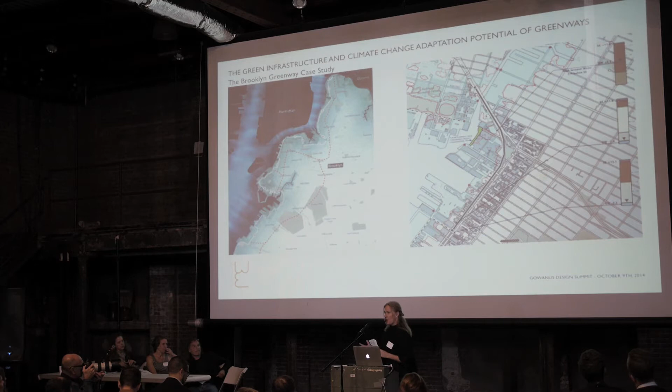I wanted to say that so far I'm hearing quite a few themes appearing through all the presentations, and you're going to hear that recurring in my presentation as well — this idea of something being stacked. We've heard about stacked resources, we've heard about stacking different partners, and we're also hearing a lot about connectivity. I'd say a lot of this project is about networking, connectivity, and stacking resources.

I can't help it, I've been doing a lot of research about greenways and working on a publication about them, so I'm going to take a minute to talk about where we've come in the development of greenway design. Robert Searns wrote a seminal article talking about greenways in terms of generation 1, 2, and 3, where generation 1 greenways were sort of the parkway system — thinking about our roadways as attractive linear parks, like if you've been on the Merritt Parkway.

And then, of course, we all remember the rails-to-trails movement that really drove the generation 2 type of greenway, and Adrian talked quite a bit about some of those rails-to-trails projects.

As we started to get to generation 3 greenways, in the last 10 to 15 years, you're looking at more complex types of open space systems, where we're moving our greenways not only from the countryside but into the urban fabric, trying to create recreational amenities and, in some cases, ecological benefits in the city.

I would argue that perhaps we're moving into a generation 4 type of greenway, where we're really stacking those resources. We're demanding a lot of our greenways — they're no longer just places for recreation, passive or active, or transportation infrastructure, but really now becoming important backbones to a larger network of green infrastructure.

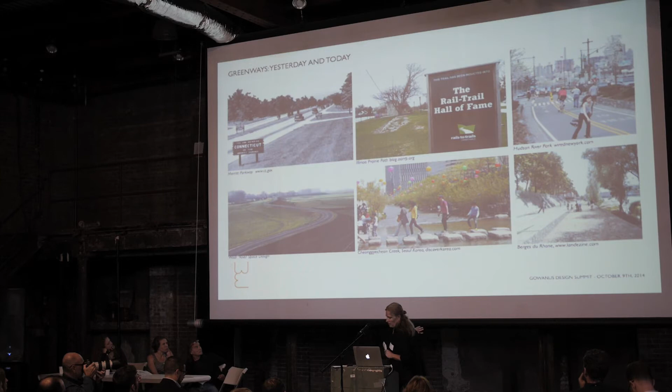And of course, post-Sandy here in New York, this is something new, but in other parts of the world — how do greenways act as a means of flood protection? I'd argue these projects shown here, I don't have time to go into all of them, are really perhaps in this generation 4, and we could add Brooklyn Bridge Park to this as well — greenway systems that really stack resources.

So the planning of the Brooklyn Greenway started back in 2004 by the Brooklyn Greenway Initiative, and they put out their design principles for the Brooklyn Greenway. Then, excitingly, in 2012 DOT put out a comprehensive master plan for how they would go about building the 14 miles of the Greenway, which will actually go into capital construction and is already started now, which is very exciting and encouraging.

The document is robust, and it talks a lot about where the Greenway will go on the street — it's all within the public right-of-way. However, it falls short of really showing how this Greenway could also be an important piece of a green infrastructure system for our city.

Our work really has at its premise that as we roll out the Greenway, we also want to roll out the opportunity to maximize green infrastructure. Adrian, I'm going to bring up your flower — it was just a lovely little diagram of why we do green infrastructure, and that's really why we did this project. We feel that while we're encouraged by DEP's support of building bioswales throughout the city, and the kind of projects we've heard about all day, we really feel like we need to do more.

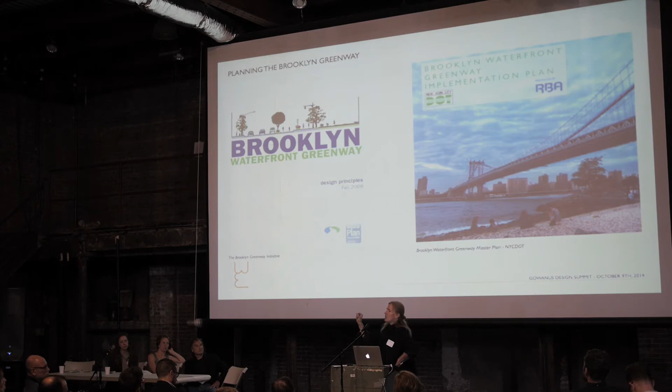What's exciting about a greenway, especially as it's built in segments, is that those segments are part of a watershed, and they're at the lowest contour of the watershed for the most part — at least the Brooklyn Greenway is. So what a neat opportunity to think of it as a backbone of a larger neighborhood system.

I'm going to go very quickly through this project so I can answer more questions later. There's a lot of details in here, but basically our methodology was to really analyze all 15 segments of the Greenway.

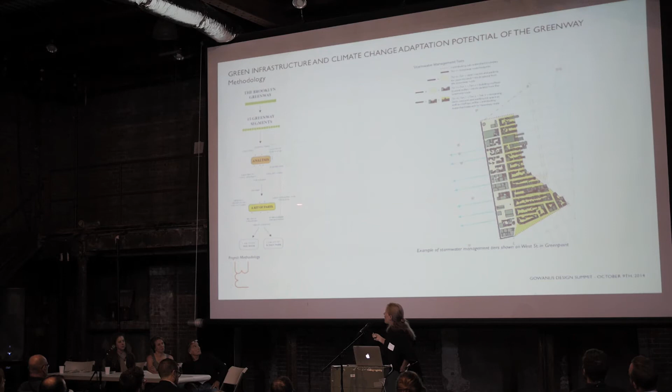We looked at all sorts of important things when thinking about green infrastructure: topography, soil, where the floodplain was, where the loading docks are. Those who have done design with swales know it's very hard in an industrial district to find places to put them. After analyzing each segment, we started to understand the kind of beast we were dealing with.

What we decided to do with this project is really create a framework that consisted of a kit of parts. We'll get more into that kit of parts in a minute.

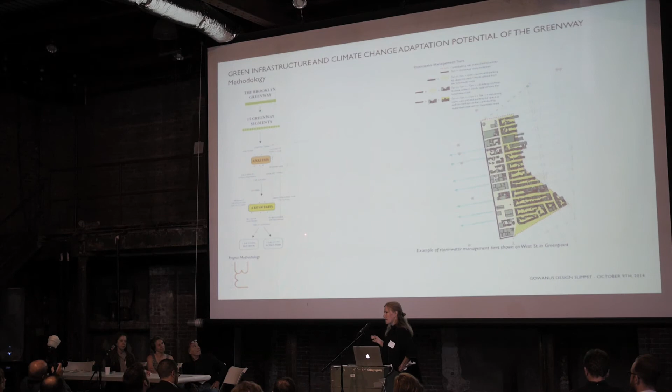We said, well, we think we need to apply this framework, we need to figure out how this actually plays out. So we picked 2 case studies, Red Hook and Sunset Park, and I'll talk more about one of those in a minute. Another important part of this framework is understanding this greenway as part of a watershed in a community.

For each segment of the greenway, we established what its watershed was, and we started to quantify, talking about ecological systems and metrics, how much water we're really dealing with in each segment.

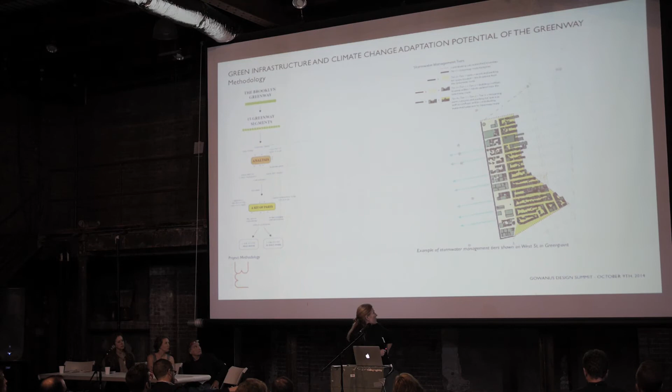We had Tier 1, which looked at how much water came off the greenway proper. Tier 2 included the streets that went one block uphill, as well as any vacant or parking lots. Tier 3 included any roofs, thinking that potentially one day we're taking water off roofs through our backbone system. And Tier 4 is the big daddy, where you look at how much water is actually coming off the whole watershed along this segment.

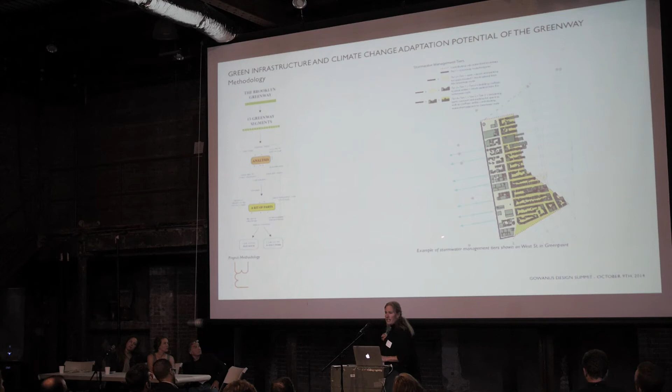This was very important to us, because we need to understand how much green infrastructure we're going to need to actually meet a certain goal in capturing the water.

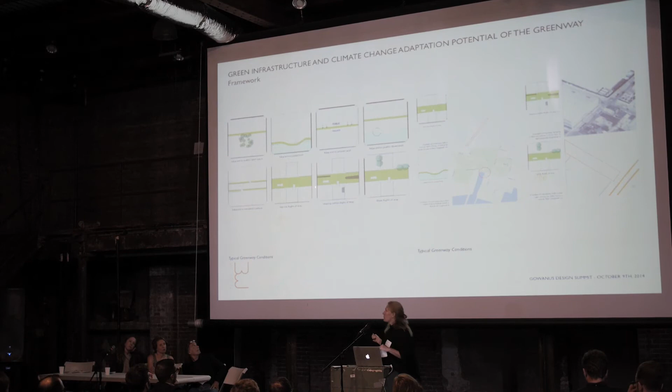So then we had to develop our kit of parts. We understood that the greenway had various conditions. Sometimes it went along a public park — that was kind of cool. Sometimes it actually went along the waterfront, which offered certain types of opportunities we could start to imagine. Sometimes it went underneath an elevated structure. We documented and came up with about 8 different conditions that we found.

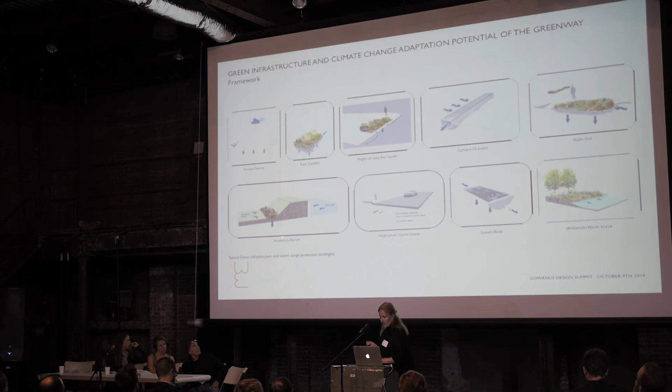Of course, we had our trusty toolkit of all different sorts of stormwater management, green infrastructure technologies — many of these you're all very familiar with. We also had to add in some resiliency barrier typologies, wetland breaks, because we're looking at ways the greenway can help with climate change adaptation and storm surge protection.

A key piece to our kit of parts is what we call the big moves. They're not big because they're rocket science and no one can figure them out — they're big moves because they're actually very hard to build and do in the city of New York. Lots of regulatory reasons, we're a dense city, lots of physical constraints. But we thought these are important — if you're going to have an interconnected system, we need to figure out how to get through these obstacles.

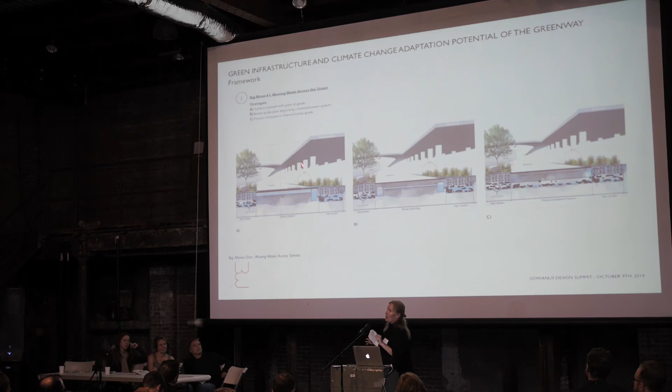I'm not going to get into a lot of detail, but currently it's very difficult to get water across the street. You can have bioswales on a block, but you can't have the overflow from the bottom, the last swale, go across the street down to the next block.

Conveying water to the nearest receiving body — the greenway often runs one block uphill from the water. So a lot of our work looked at how we could get that water from the greenway down the street, or in some form, as quickly as possible to the nearest receiving body.

A lot of our work looked at this: it isn't so much about collecting a certain percentage of water in a bioswale and that is it. It was more about how do we keep the system continuous and get that water filtered and clean to, in this case, mostly the East River or the Erie Basin.

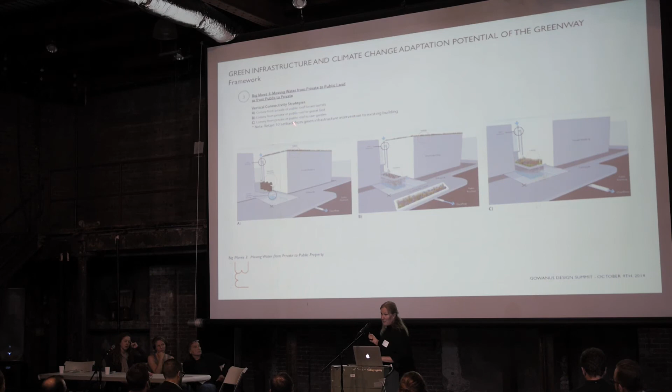This one is also a big no-no right now: getting water from private property to public land, and then water from public land to private land. There are very good reasons why this isn't allowed — I'm not going to get into that — but I believe that with enough smart people, we can come together to figure out how to get past this obstacle, because we'd be able to build a lot more green infrastructure if we could.

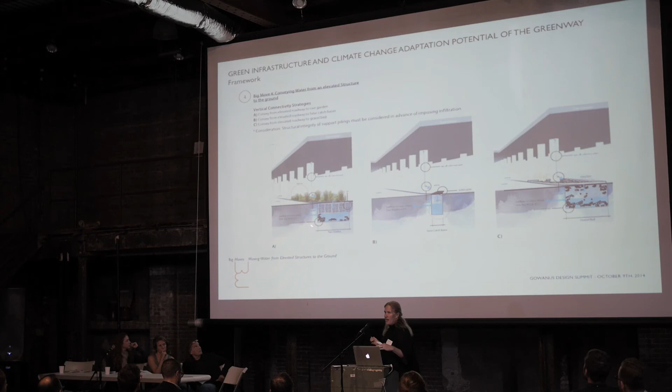I'm going to move a little more quickly. Also thinking about, given that we have lots of elevated structures and highways, how can we take all that water and deal with it somehow through green infrastructure on the ground? I know Susanna's not here yet, but she's done a great project looking at that as well.

At the end of the day, this framework works like this: you take your condition, you put together the typologies or techniques that make the most sense within that condition, and you get a set of outcomes. We started to look at all the environmental and ecological outcomes we get from pairing this framework together.

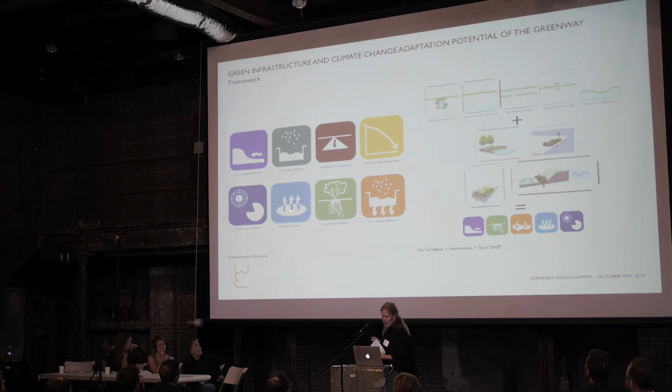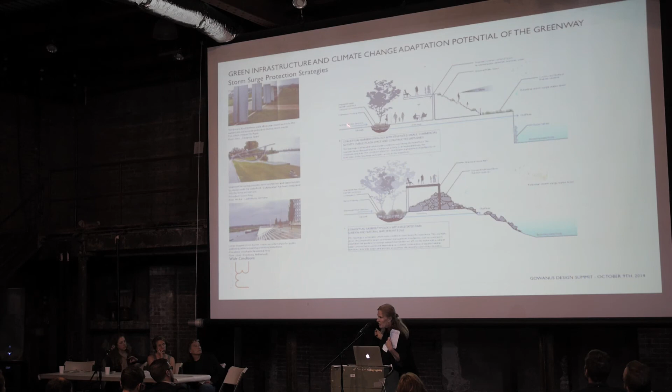This became our scaffold for how we started to look at different sites along the Greenway. In addition, because we have a number of sites along the waterfront, we started to think about what if this Greenway was raised? What if it actually acted as the storm surge barrier? Could it also be the mechanism for stormwater while also keeping our neighborhoods protected?

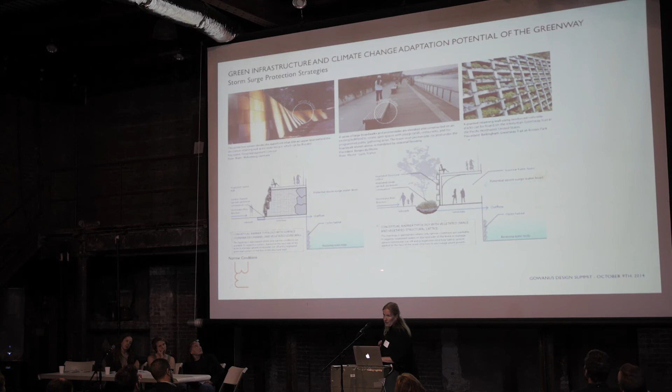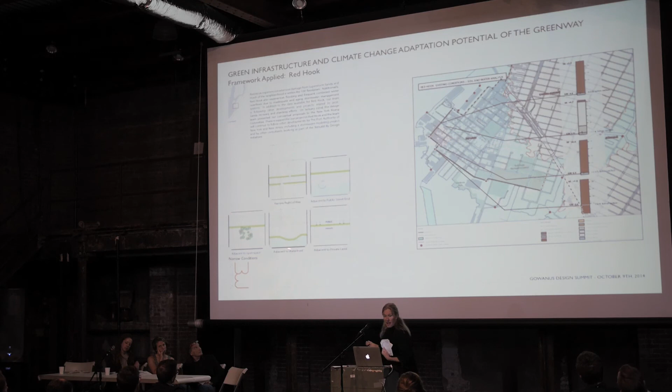We looked at these wide strategies, but we also looked at narrow strategies, given that space is often a constraint. So I'll go quickly. We looked at Red Hook, right next door, more closely, since it got quite a bit of flood inundation.

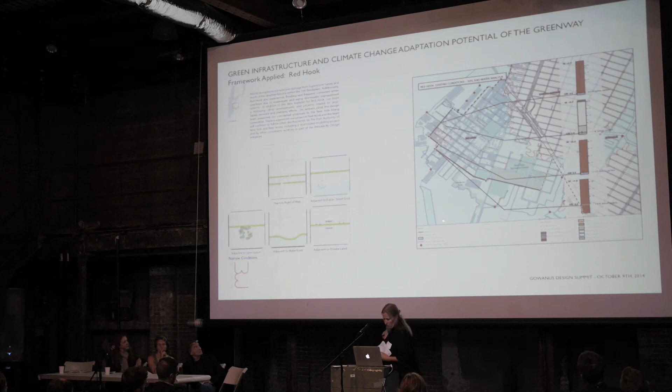So what we did was look at soil, and you have some high water tables here, creating a challenge for us. And we identified specific conditions. That's going to drive me crazy.

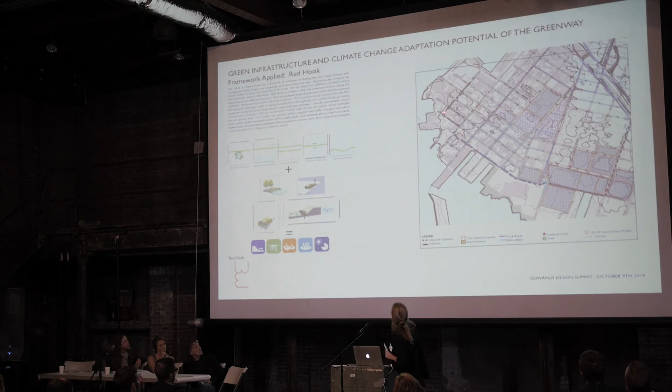It's gone. Again, here's our framework, here's what we've got. These are the typologies, and these are the positive outcomes you get. We mapped loading docks, we mapped large street trees. As many of you who do green infrastructure know, it's hard to work around legacy trees. There's a couple other things mapped on here.

And then we created that master plan. I'd be interested in having a discussion about the pros and cons of master planning, because I'm not so sure it's something you definitely want to do.

But anyway, we took our framework and said, okay, we know we have certain conditions, we know the typologies that work well for each condition, and we know these big moves are important. We want to keep the water going and get it to the receiving body.

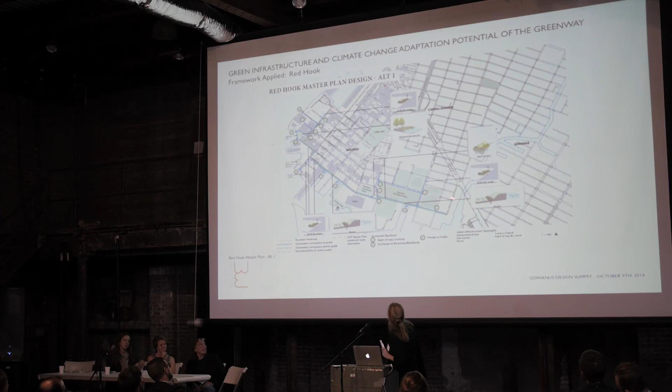So our first alternative actually uses the master plan path and really maximizes green infrastructure over resiliency. Our alternative two, we couldn't help it, we had to take it out to the edge and see what was going to happen there.

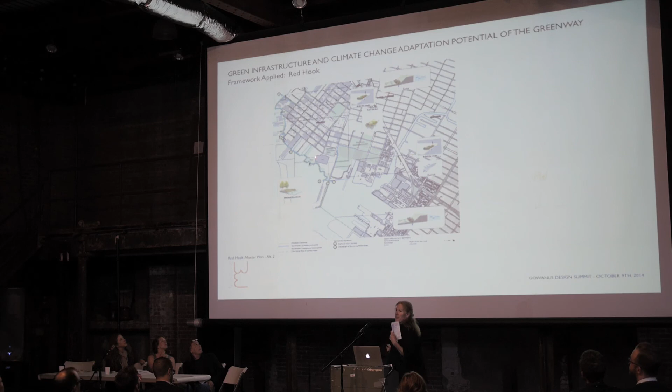Along the theme of discussing things with private developers and owners, we've actually engaged in quite a few conversations with private owners. They're concerned about flooding of their sites as well.

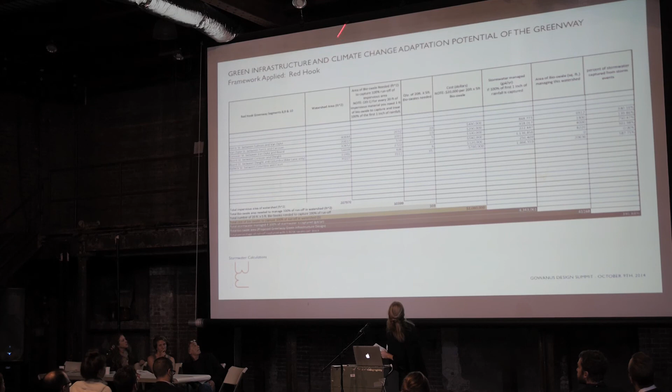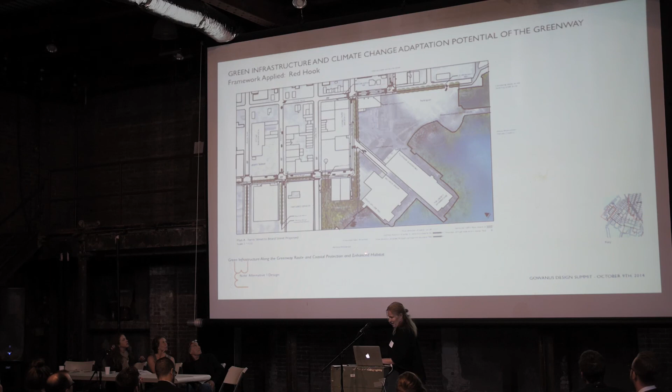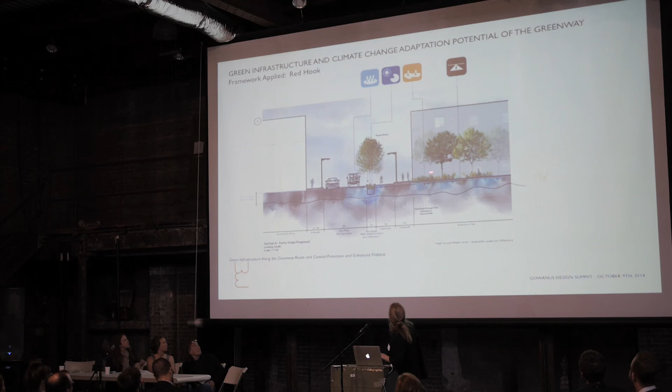Then we quantified all this and figured out how much water we'd be collecting through all these different mechanisms. We're not trying to redesign Valentino Park here, but we're using it as a way to get some of that water off the street through a park and out to the Erie Basin, mostly looking at swales and street ends. Our sections here were your typical bioswale, looking at connecting them into parks.

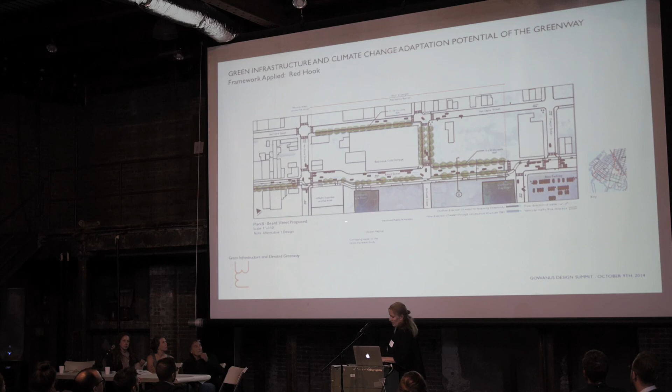Along Beard Street, we did a study of how we could raise it, mostly to show some of the constraints. We'd have to integrate some sidewalks, so you'd have a raised sidewalk. It takes about 150 feet to get the ramp to code to reach the top, so this isn't something you could do on a block-by-block basis.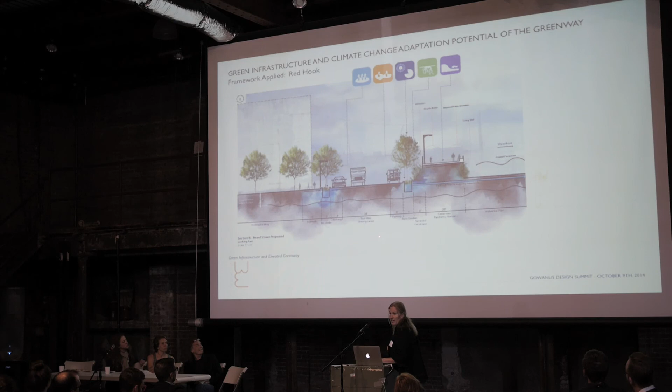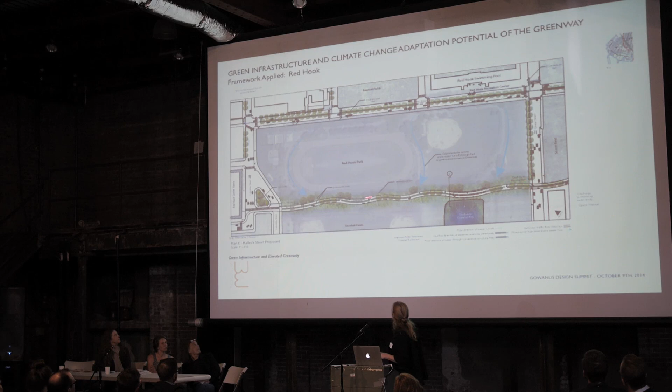You'd be doing this all over the place, which wouldn't really make much sense. But it's also an intriguing idea for places where you can do this, having that experience of being elevated. This is along Red Hook Park—actually a mapped street called Halleck Street that's now just an abandoned road. The idea would be to turn this into the Greenway, running through here as an elevated structure that extends into the park.

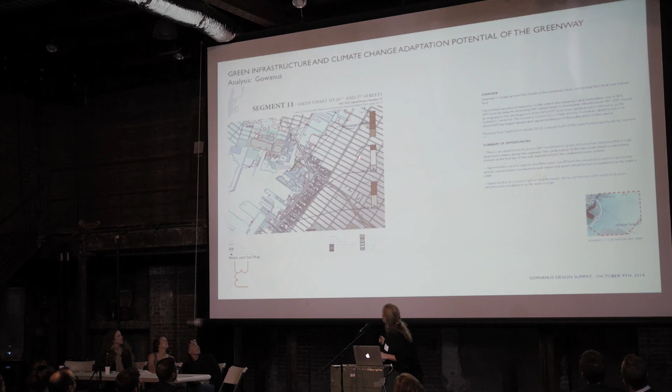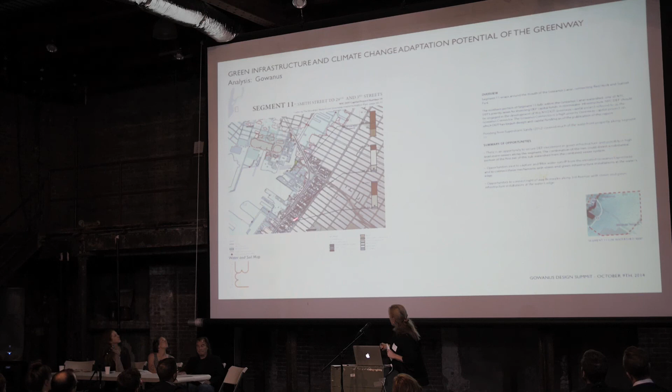This brings us to—sorry, you can't read this here—we didn't pick Gowanus as a case study, but we did a lot of analysis of the Gowanus stretch of the Greenway running up Smith Street and then Hamilton Avenue. We have some high water table there too, as I'm sure you guys know already.

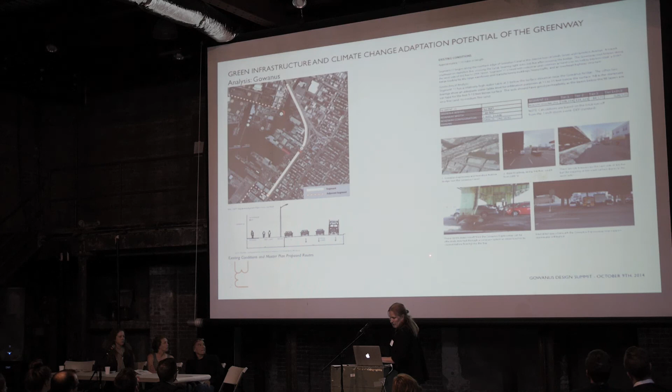We started to look at existing conditions and quantified the water in all the tiers of the watershed to understand the kind of water we were dealing with. We began to identify opportunities—this isn't legible, but most of what we found was that even though there are lots of loading docks along Smith Street on one side, there's room for some swales on the other.

Thinking about the use of street ends, a lot of the work for Gowanus has already been done in many ways along this type of thinking. You've got Sponge Park, you've got the kind of work that Lee is doing. So I think there's already a lot of really good thinking along those lines.

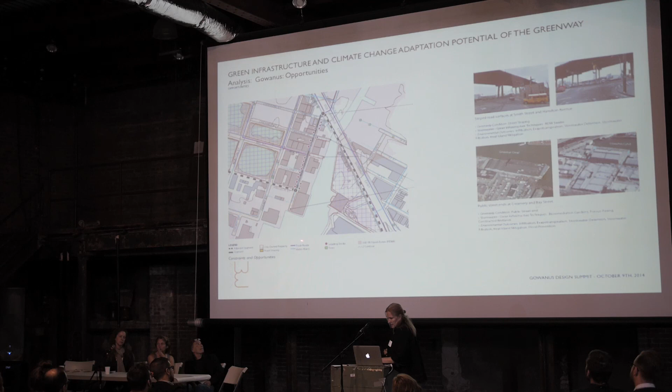And then on the other side, just potentially working around the elevated structure to think about how to capture more water. And that is that—a very quick run through.